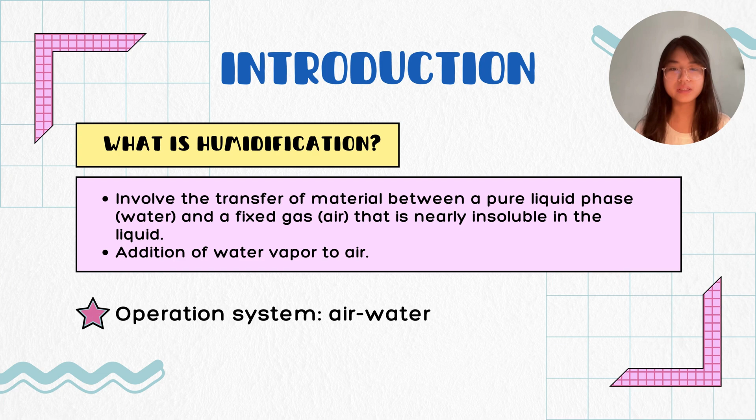Humidification involves the transfer of material between a pure liquid phase, which is water, and a fixed gas, which is air, that is nearly insoluble in the liquid. Basically, it is the addition of water vapor into air. The operation system for humidification is air-water. Humidification occurs when water absorbs energy, evaporates into water vapor, and mixes with air. The energy that the water absorbs is called latent heat.

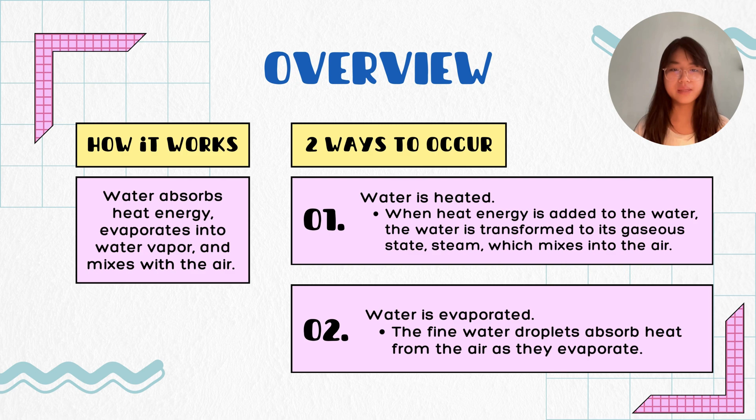So, there are two ways for humidification to occur. In both methods, energy is added to the water to create water vapor. Firstly, the water is heated. When the heat energy is added, the water is transformed to its gaseous state, which is steam, which mixes into the air. Secondly, the water is evaporated. The fine water droplets absorb heat from the air as they evaporate.

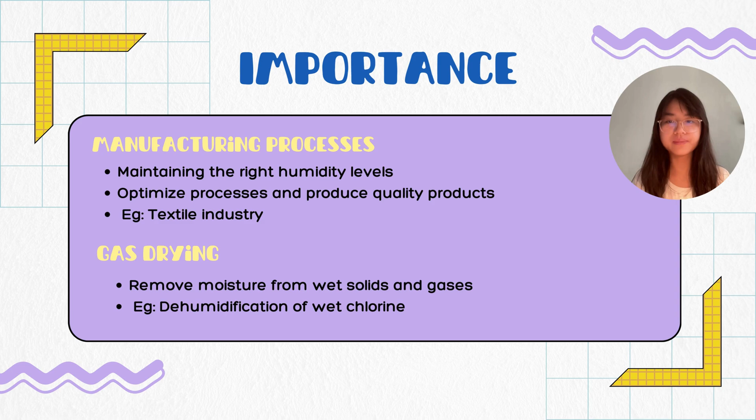The humidification process is quite significant for multiple commercial usages. Firstly, in the manufacturing processes, maintaining the right humidity level can help optimize processes and produce quality products. For example, in the textile industry, humidity helps fabric maintain their elasticity and reduce the risk of tearing. While in gas drying process, humidification is used to remove moisture from wet solids and gases. For example, wet chlorine must be dehumidified before it can be handled in steel equipment to prevent corrosion.

Next, in evaporative cooling process, water spray humidification can be used in applications that require evaporative cooling. As the air loses heat to vaporize the water particles, the temperature of the atmosphere drops slightly. While in desalination, it is the technique that uses a heat source to evaporate saline water from a fluid such as air or water.

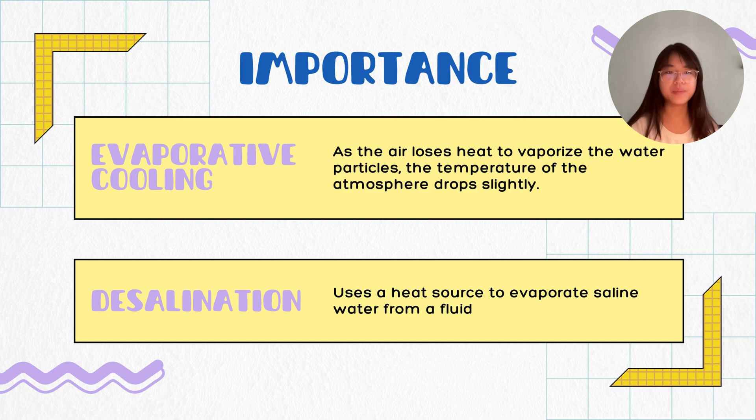In addition to its industrial application, humidification also matters in everyday life. Humidifiers are widely used in homes and offices, contributing to comfort, health, and well-being. Maintaining appropriate indoor humidity levels can help alleviate respiratory issues, preserve room furniture, and improve overall air quality.

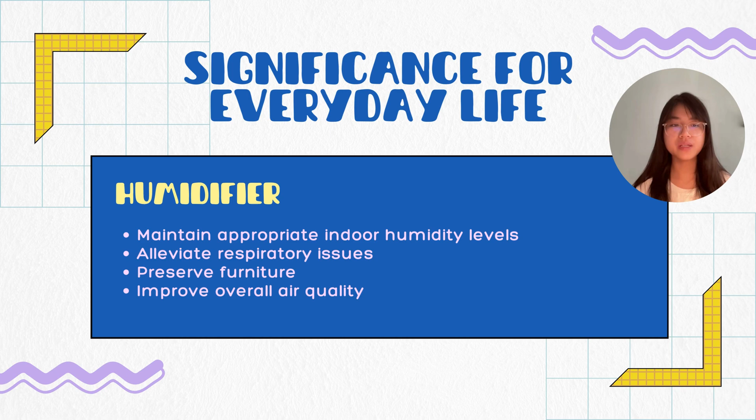Humidification plays an important role in understanding and controlling moisture levels in various systems. It begins with understanding three key concepts, which are relative humidity, dew point, and psychrometric chart. Let's go with first, RH. It represents how much water vapor is in the air as compared to what it can hold at a specific temperature. For example, at 50% RH, the air is halfway to being fully saturated with moisture. So this concept is critical for designing processes like cooling towers and drying chambers.

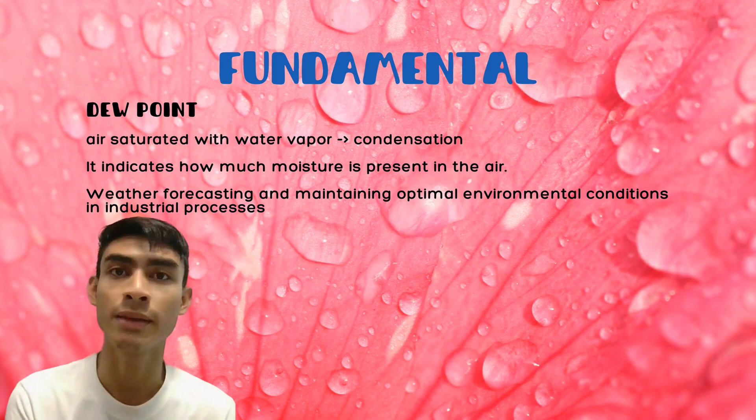Next, the dew point is the temperature at which air becomes fully saturated and the water begins to condense. In chemical engineering, controlling the dew point is essential to prevent equipment damage and ensure product quality. Below 50, the air feels super dry, your skin can feel rough, and it is a good time to grab some moisturizer. 50 to 60, this is the sweet spot where the air feels just right, not too dry and not too humid. Life's good and you're comfortable.

61 to 65, things are starting to get sticky. Your sweat doesn't evaporate so fast, so you might sweat. 66 until 70, it's getting uncomfortable. You're sweating in places you don't even know you could sweat, and the air feels heavy around you. 71 to 75, now it's like walking through a cloud. You're drenched in sweat, and the air is so humid it's hard to feel refreshed.

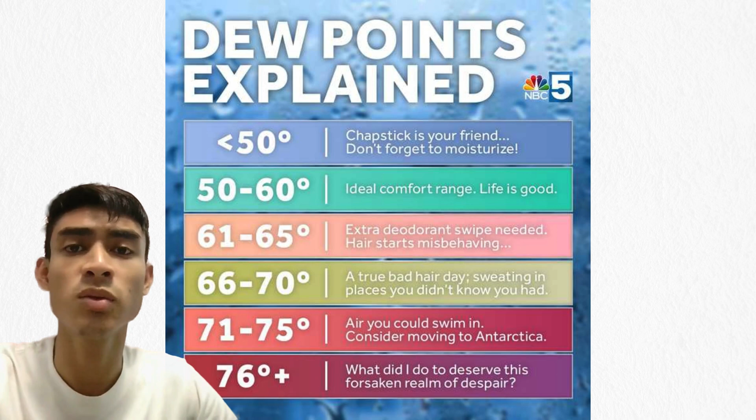Moving to Antarctica might sound tempting. 76 and above, it is absolutely unbearable. The air is so full of moisture and it feels like you're swimming. Your body struggles to cool itself and it's just miserable.

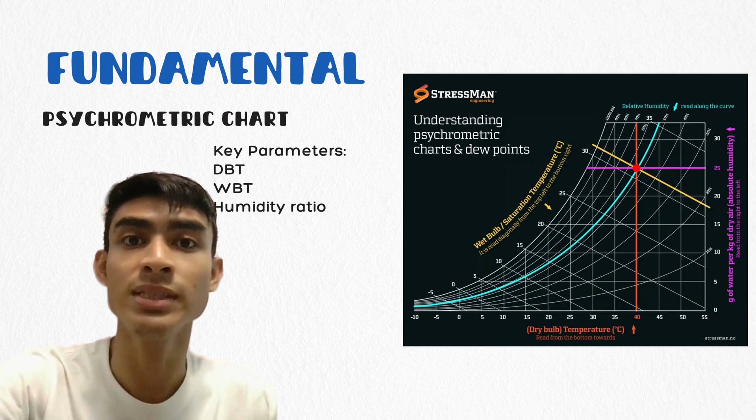The purpose of this psychrometric chart is to graphically represent the physical properties of moist air. Dry bulb temperature, DBT, is air temperature measured by a thermometer. Wet bulb temperature, WBT, is temperature with evaporative cooling effect. Humidity ratio is mass of water vapor per unit mass of dry air. For example, this psychrometric chart is used to design and analyze HVAC systems or industrial humidification setups.

Finally, humidification is essential in separation processes, such as absorbing water vapor into liquids or removing moisture during drying processes. Each operation relies on precise control of humidity for optimum performance and energy efficiency.

Moving on to the next slide, I'll be talking about the daily life applications of humidification. While humidification might sound like something primarily used in industrial settings, it plays a significant role in our everyday life, ensuring comfort, supporting health, and even aiding in agriculture. So, let's start with the basics.

Humidification is the process of adding moisture to the air. This is particularly important indoors, where air can often become too dry due to heating or air conditioning. By maintaining optimal humidity, typically between 40 and 60%, we create an environment that is not only more comfortable but also healthier. Dry air can cause various problems, from skin irritation to respiratory discomfort.

It can even increase the spread of viruses. That's why humidification is such an essential part of our daily living space. Now, let's look at some specific applications of humidification in daily life. First, in our homes and offices, devices like humidifiers and air conditioning systems help maintain air moisture. These are particularly useful in air-conditioned spaces, where the air can become excessively dry.

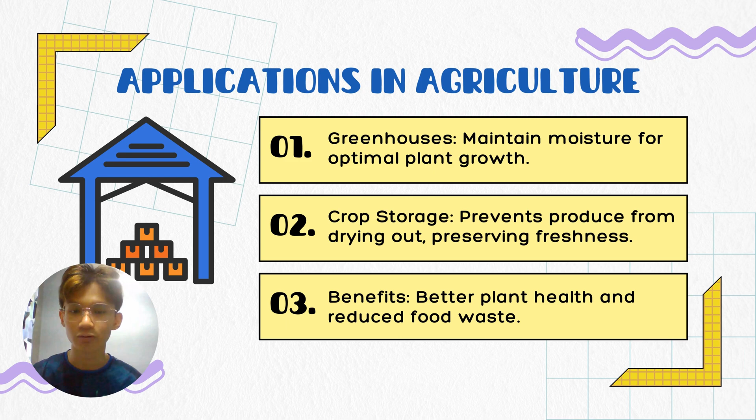Additionally, for stored crops, humidification prevents produce from drying out, preserving freshness and quality for a longer time. This is vital in reducing food waste. Keeping things in good condition, humidification is a process that supports our daily life in many unseen ways. So, let's move on to the industrial application of humidification.

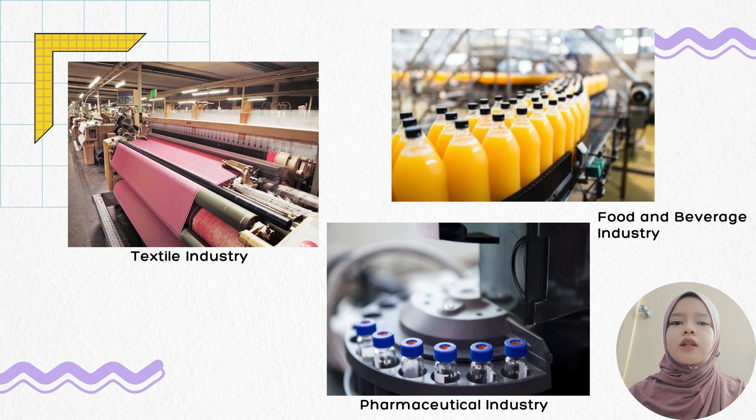It might sound simple, but humidification plays a vital role in ensuring quality, efficiency, and safety across various sectors, including the textile industry, pharmaceutical industry, and food and beverage production. So now, let's dive into how and why it's so important. Let's start with the textile industry.

Have you ever wondered why fibers sometimes break during production, or why static electricity disrupts weaving processes? The answer lies in improper humidity levels. In textile factories, controlling humidity is critical. Proper moisture levels prevent fibers from breaking, ensuring smoother production. Moreover, humidifiers reduce static electricity, which can disrupt spinning and weaving operations.

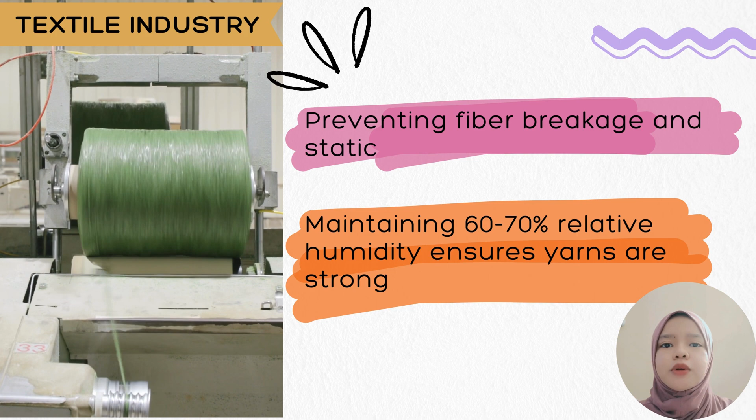For instance, in cotton spinning factories, maintaining 60 to 70% relative humidity ensures yarns are strong. This not only reduces waste, but also improves product quality, saving time and money. Let's move on to the pharmaceutical industry. Humidification ensures the stability and safety of medicine throughout production and storage. Without proper humidity, tablets can crack or stick together.

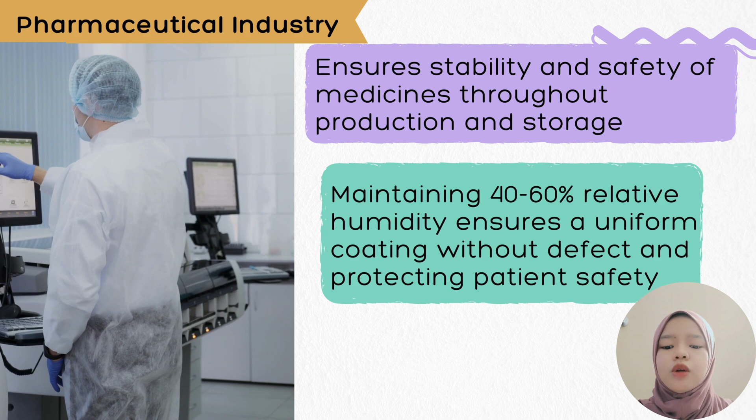Take the tablet coating process for example. Maintaining 40 to 60% relative humidity ensures a uniform coating without defects, meeting regulatory standards and protecting patient safety. Next, we have the food and beverage industry. Humidification is crucial here to preserve freshness and maintain quality.

For example, bakeries rely on humidification during proofing to ensure perfect fermentation. In cheese aging rooms, maintaining 85 to 90% humidity is essential for proper ripening without cracking or drying the outer layer. Proper humidity doesn't just extend shelf life, but it also ensures food tastes and looks its best. So, why is humidification so important across these industries?

Let's break it down. First, it ensures consistent product quality by preventing defects, whether it's brittle fiber, unstable medicine, or dehydrated food. Second, it improves operational efficiency. Machines run smoother and waste is minimized. Third, it ensures compliance and safety, particularly in industries with strict regulatory standards like pharmaceutical and food production. To summarize, humidification protects materials, enhances processes, and supports sustainability.